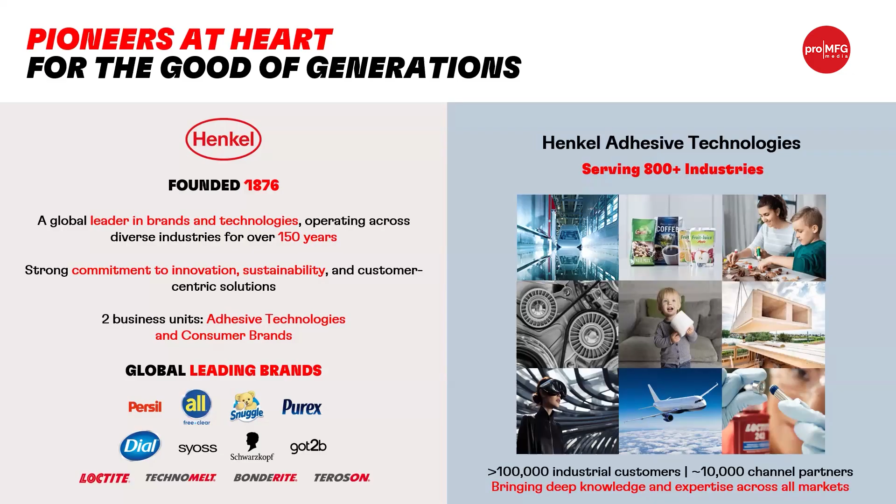Welcome you all to this masterclass on solutions for asset integrity across ports, jetties, and the tanks zone. I will start by briefly introducing Henkel and sharing what we offer. Henkel is a global organization with its headquarter in Germany. Henkel operates into two categories: adhesive solutions and consumer brands. With a long legacy of 150 plus years, Henkel brings sustainability and reliability to its customers with an innovative approach across its brands, be it in industry as well as the consumer market.

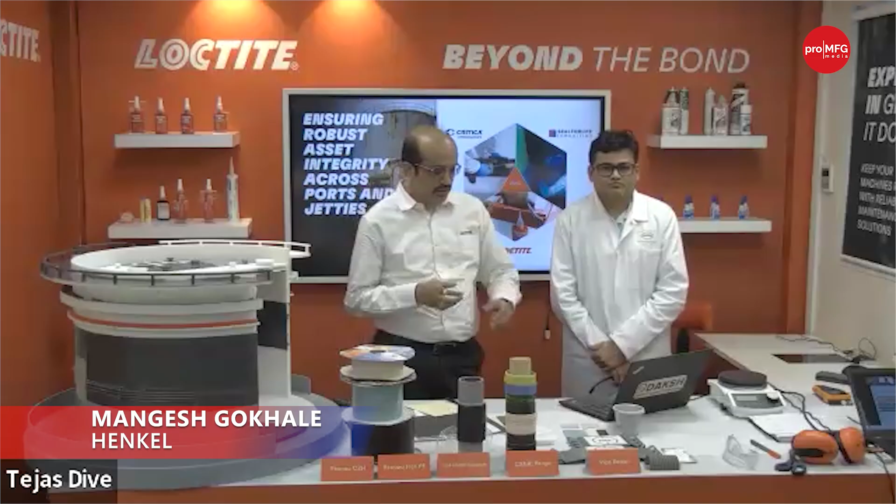Within the consumer industrial market, we have many brands and segments to deal with. Today we'll be focusing mainly on solutions for maintenance, repair, and overall asset integrity. What we represent here today is a combination of three brands: Critica Infrastructure, Seal for Life, and Loctite, which help maintain assets to prevent them from being affected by aging effects and ensure they perform to their desired outcome. We have a comprehensive portfolio of solutions.

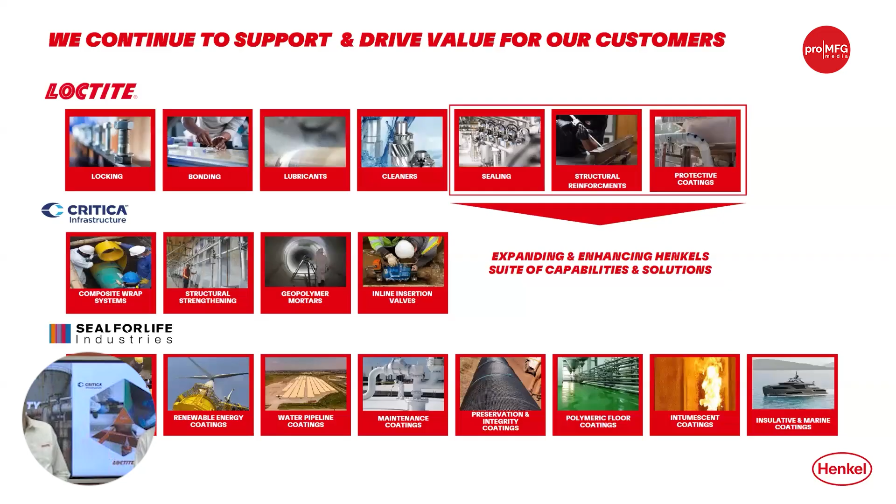Recently, Henkel has acquired Seal for Life and Critica Infrastructure. So what we can offer is an unmatched portfolio that deals right from upstream, downstream, and midstream solutions across the industry for corrosion protection, wear prevention, civil applications, composite repairs, and reinforcement. Within various industry segments, Henkel has brands in various solutions in Loctite, Critica Infrastructure, as well as Seal for Life, and we cater to multiple industries, multiple segments, to ensure assets perform to their maximum capacity.

So why this topic today? We wanted to showcase the solutions we can offer to aging infrastructure. India has a widespread coastline which has jetties, ports, and a tank network, and because tank storage capacity is growing, it is also aging each passing day. So we wanted to showcase our solutions through this webinar, this session. We encourage you to make it as interactive as possible, and we welcome all your questions and queries. Also we have a feedback form at the end, so we request you to fill that form and help us engage further.

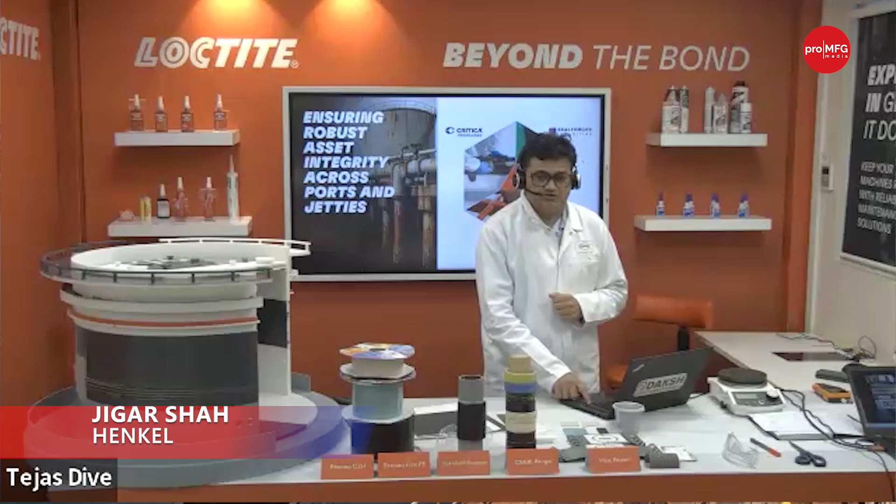So we can have our first poll here before we go to Jigar. Let me quickly go to the next chapter of the webinar. We'll reshare the slide, it's not moving. So now we are going to talk more about the right side.

So how the corrosion protection solution, composite repair, and thermal insulation coating really help increase the life of the asset, altogether ports and jetties. So we'll see the corrosion protection part first.

Corrosion is creating a big economical impact on India's GDP. Reports and studies say that corrosion costs around 3 to 5% of the GDP annually in India. That's a big number, and how we can protect the assets for the longer run and make it durable, that is a challenge.

When it comes to carbon steel, considering the big coastal line of India, we see a big corrosion rate, around 0.1 mm to 1 mm per year. That's a big corrosion rate for carbon steel, and no doubt there are many corrosion protection solutions available in the market to stop the corrosion.

However, considering the various effects, there are different phenomena, let us say the presence of chloride salts onto the surface, onto the atmosphere, and the high humidity nearby the coastal line.

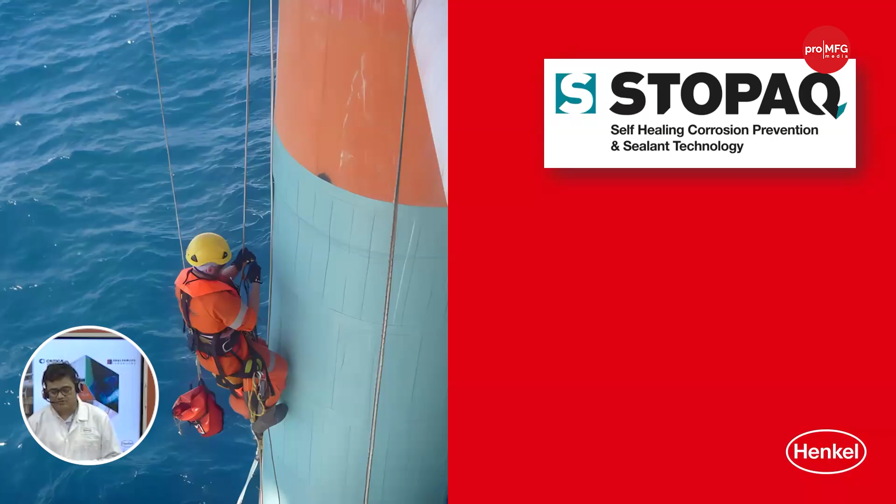Now, when it comes to the solution part, we are going to talk about Stopaq here. We call it Stopaq, and this is a kind of elastic solution that helps provide permanent or long-term corrosion protection with a self-healing kind of solution.

What are the properties of this Stopaq? When it comes to the property, basically this Stopaq altogether is a polyisobutene based coating technology. What exactly it does is create an impervious layer. So whether water, oxygen, or MIC is there, it will not penetrate the PIB, and it creates a barrier effect continuously to stop the corrosion. So this is how the PIB based Stopaq really works here.

Another important parameter is the bonding, the adhesion onto the surface, onto the unprepared or low prepared surface. The minimum requirement of the Stopaq is surface preparation ST2. That is the minimum requirement.

Here what we do is run a demonstration, and I'm having a panel. You can see the rusted panel, so this is the rusted panel that I'm carrying.

What we do is use a kind of ST2 surface preparation here. Let me use the wire brush and also the emery paper. The idea is the minimum surface preparation requirement for the Stopaq. If we consider other corrosion protection solutions, the liquid ones, the ideal condition is blast cleaning, whether it's SA2.5 or SA3. But with Stopaq, we can go ahead with minimum surface preparation.

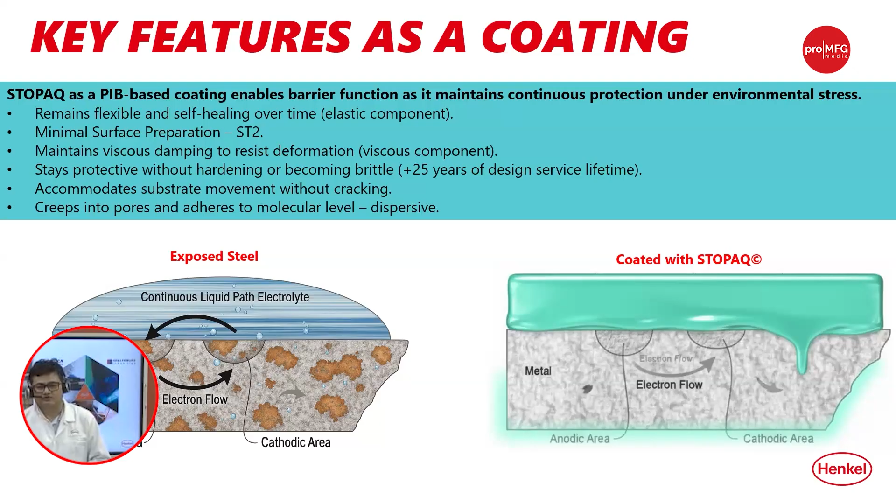Coming to the full value chain of this Stopaq, apart from providing long-term or permanent corrosion protection, safety is a big right in industry. Here you can see the Stopaq is non-dangerous good, non-toxic, easy to handle, easy to transport, and also being non-crystalline, or non-cross-linking amorphous, fully amorphous material, it can provide longer shelf life as well.

Coming to the pre-preparation part, before applying to any asset, let's say the pipeline or tanks, the minimum requirement is ST2 with solvent cleaning and removing loose rust and dust. Then, as mentioned, it is substrate agnostic, meaning it can apply on dry surfaces as well as wet surfaces, condensing lines, so there is much versatility with the application when we talk about the Stopaq. When it comes to the installation part, there is always a challenge when we talk about liquid coatings during installation.

So we need many tools and tackles required, whether it's for a blasting machine, air compressor, and whatnot. But to apply the Stopaq, we just need minimum tools - let's say a scissor or cutter, one or two different tools that we need, and then it's very easy to wrap it.

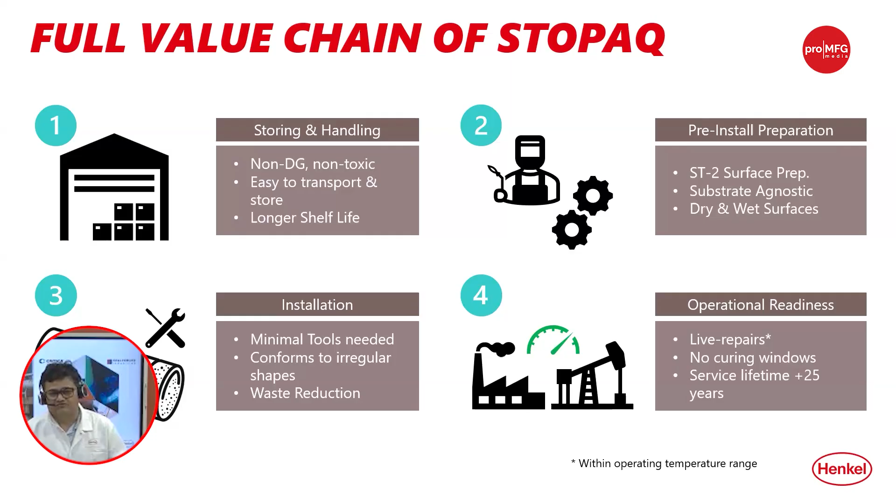Now going forward, we can see how this Stopaq can be applied on the splash zone area. So we'll run a small video on the splash zone.

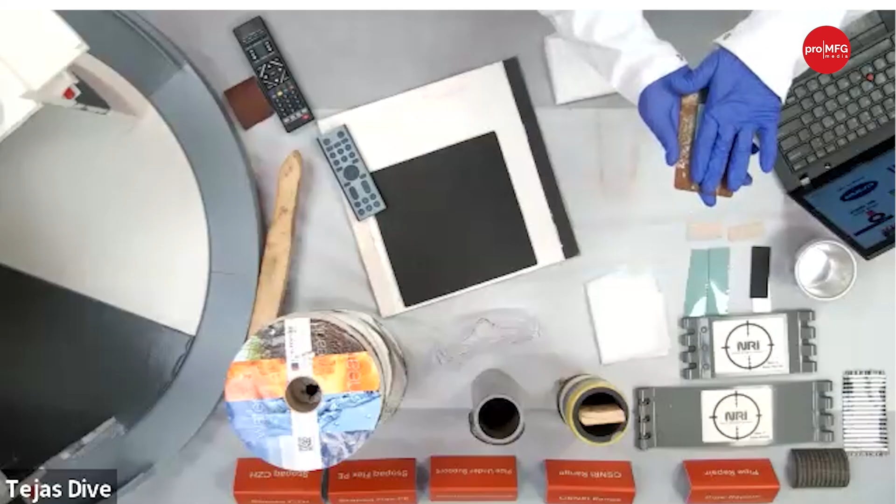As you can see, to apply this Stopaq we do not need blast cleaning. Now what we do is run the demonstration on a rusted surface. So we applied this particular Stopaq on the rusted surface, and now we see the adhesive works - I'm now just going to pull it, and you can see the adhesive part as well.

Okay, so lots of force that I need to apply to remove the top part, and you can really see it's very, very difficult to remove Stopaq after bonding onto the rusted surface, almost covering more than 95% of the area of the surface. This is how Stopaq will remain there and provide continuous long-term corrosion protection.

You can see there are different asset owners in India that have used this particular Stopaq application - that is Indian Oil, Reliance, Adani, and many other Indian customers.

Now coming to the composite system - composite repairs can provide a proven, reliable, and safe solution to repair and strengthen damaged pipelines, tanks, and different equipment without any replacement. All the composite pipe systems we provide are based on high strength fiber reinforcement along with an engineering polymer matrix embedded together to create a composite wrap that can not only provide corrosion protection but also sustain pressure and provide chemical compatibility.

So non-metallic pipe repairs - that is what we normally recommend to our customers because there are multiple benefits provided with the non-metallic option. Since it is not a metallic pipe, it cannot corrode.

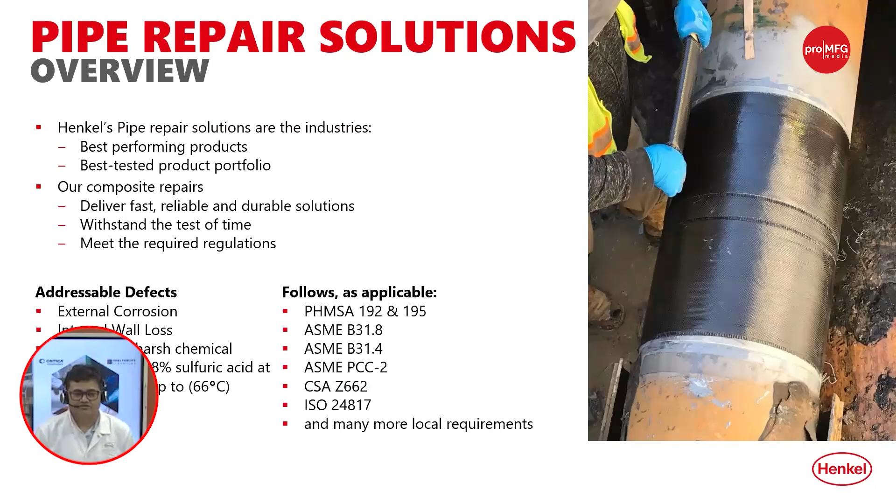Let's say the wall loss or thickness loss, or pinhole or cracks, or exposure to very high chemical areas. These are all challenges that we can target or solve with the composite pipe repair system.

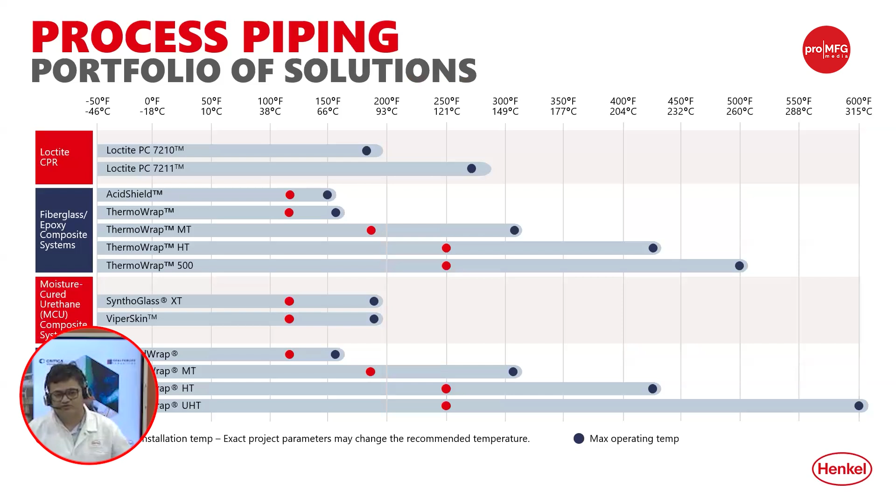Coming to the different portfolio available with Henkel. Considering the CSNRI, we now have a bigger portfolio on composite pipe repair. With Loctite composite pipe repair, we can address and repair and strengthen the pipeline and tanks up to 130 degrees centigrade with various chemical exposure.

With epoxy composite solution system fiberglass, let's say the AcidShield that is developed for acid environments or acid pipelines or acid tanks, to strengthen them. Moisture cure urethane is basically designed considering condensing pipelines or underwater pipelines or piles. To strengthen that, we can also apply the moisture cure polyurethane.

And there is another system we call the Diamond Wrap, which is again based on epoxy and carbon system, where this can work up to 315 degrees centigrade. So a big portfolio to cater to different applications and challenges to increase the life of the asset.

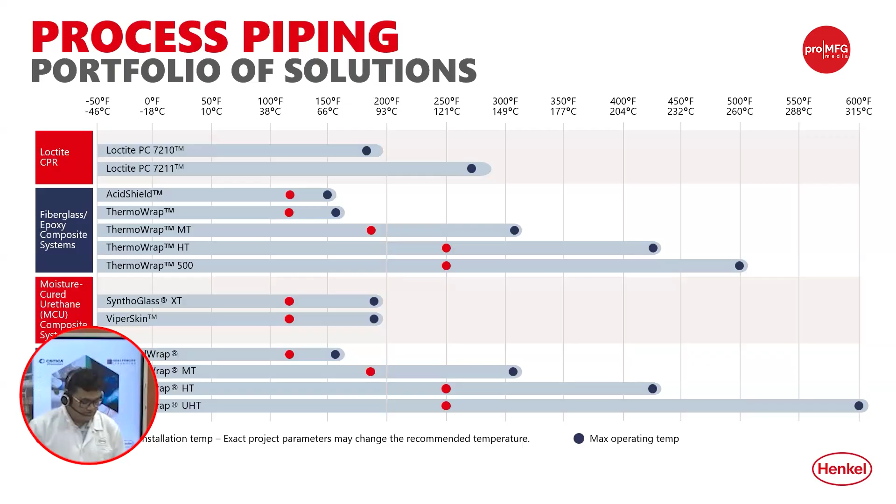On the fiber side, normally we are working with carbon fiber, glass fiber, mix of carbon glass, and also basalt fiber. In terms of the engineering polymer matrix that is embedded to the fibers, that is mainly epoxy and polyurethane. So these are the overall systems or solutions we are providing to increase the life of the asset.

Now, quickly, we are having another solution we call composite clamp. So here you can see it on my hand. This is helpful if there is an online leakage from water or hydrocarbons up to 17 bar. We can use the composite clamp, available from 2 inch, 3 inch, 4 inch, 6 inch, and 8 inch sizes, and that can work very fast.

And the benefit is, on this composite clamp, we can also wrap the composite repair system as well to make it permanent. So this is how we can provide the solution.

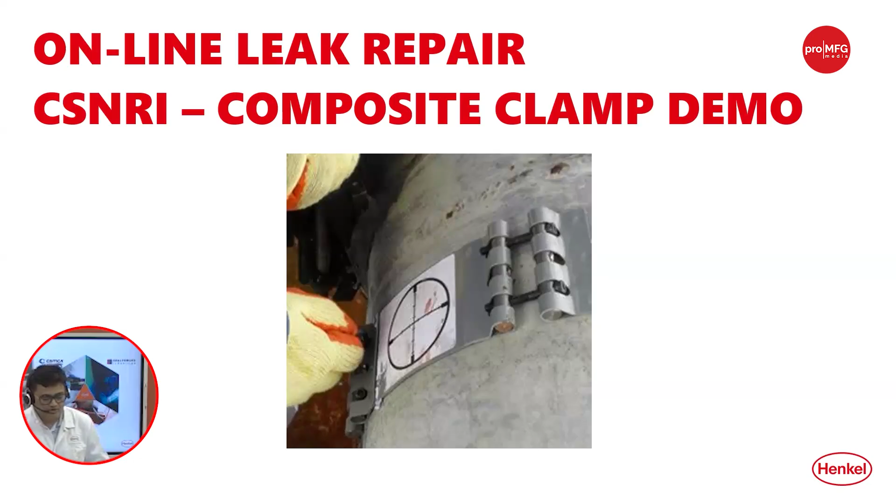Now, I would request Tejas to perform the composite clamp demo that is live online.

Thanks, Jigar. Before moving ahead, can you just please confirm if I'm clearly audible? Yeah, okay, so I hope now you all can see me.

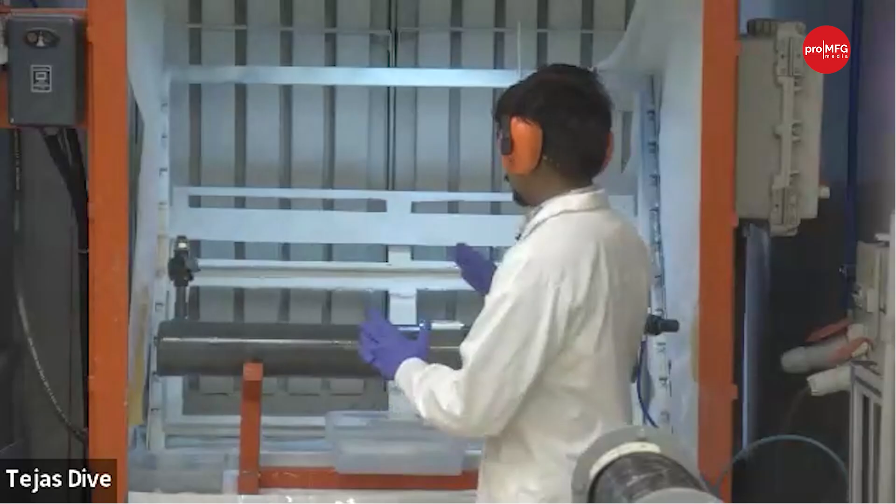So this is our demonstration setup where we have a 4-inch pipe with a composite clamp for the 4-inch pipe. What we will do is pressurize the system. As soon as we pressurize the system, there is a leakage in the pipe. See the water coming out of the pipe, and we will arrest the same with the help of the CSNRI clamp.

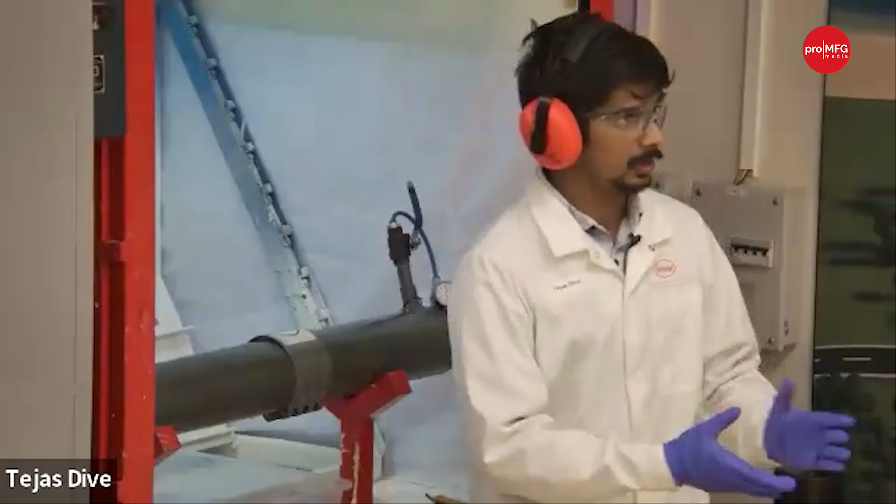So for a better look, we will just quickly shift the camera angle. I just request the same to Jigar, and Jigar, please confirm once the camera angle is changed. Yes, yeah, thank you.

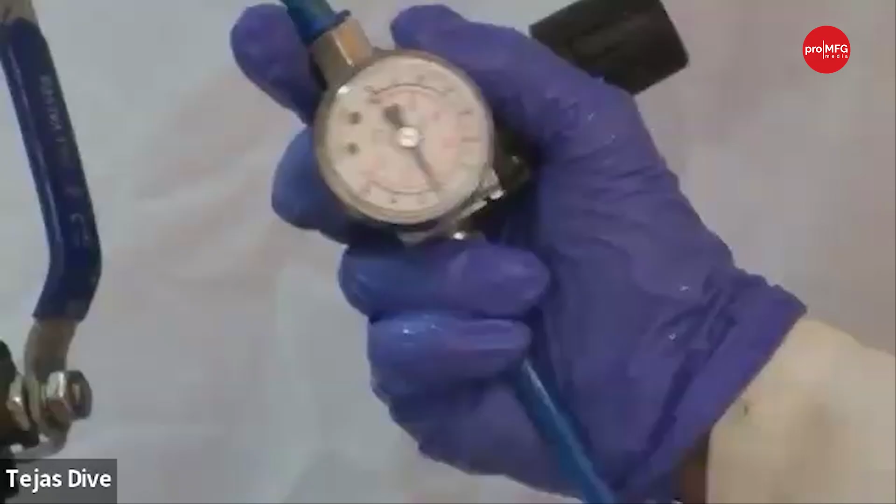Okay, so now this is about composite clamp. Now we will just have a quick look at the pipe repair and strengthening solutions in the CSNRI portfolio.

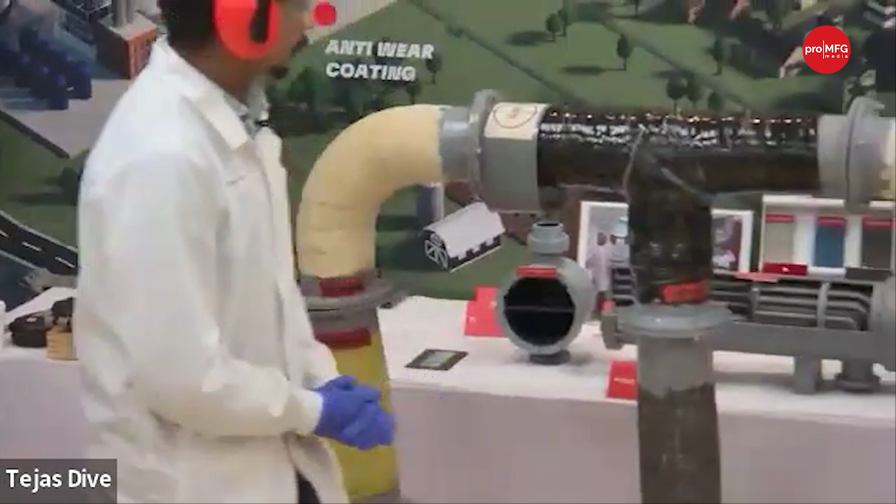Okay, so this is how the solutions will look. We have different solutions for different applications, as an example higher temperature, depending on the requirement. So what you can see here is Loctite 5085 with 7210, then again thermo wrap, diamond wrap, which will vary as per the requirement. And yes, we can not only apply on the straight pipe, but to elbows and also the T-joints.

Yes, with this is about composite clamp and the strengthening and repair solutions with CSNRI. And with this, back to you, Jig.

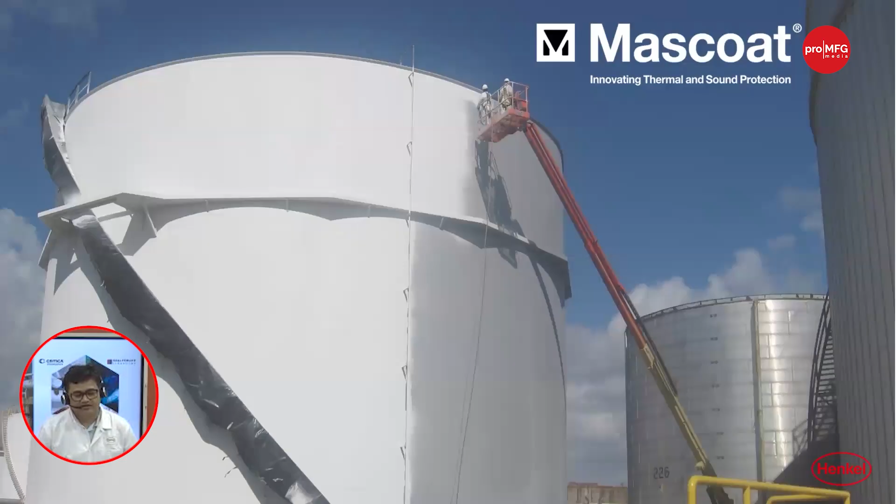The next part of it is thermal insulation coating, and that thermal insulation coating provides benefits like energy retention, personnel protection, radiant heat reduction, and also managing the insulation as well. Mascoat is very much prominent, and Mascoat has been providing this solution for more than 35 years in the industry to support the customers.

So you can see that in industry, if you go and visit any plant or process industry where insulation is being used, we can definitely find similar kind of challenges to what you are seeing currently. As per studies and references, there are 10 to 30% of the area in the industry where we can find that insulation is either damaged or not available. These are big challenges, because if the insulation is damaged, it can create a kind of challenge to the customer. And if insulation is not there, it is consuming more energy to maintain the temperature. So it's a big challenge to the industry now.

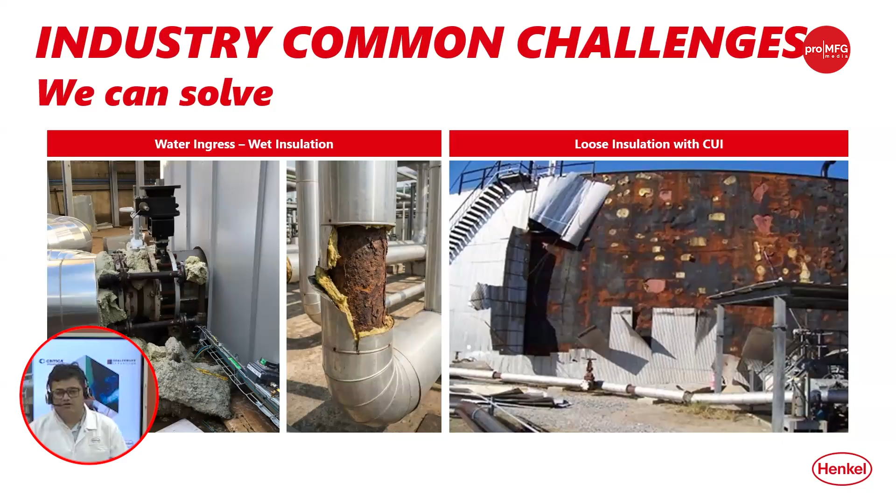How can Mascoat provide the solution related to personnel protection? Let's say the temperature of the surface is exposed to 120 or 130 degrees centigrade. If we apply a 1mm coat of the Mascoat, it can reduce to a safe-to-touch temperature. As per standard 1057, that temperature is 58.3 degrees centigrade. Beyond that temperature, it is not safe to touch, and below that is safe to touch. So after application of only 1mm coating, we can really see that it is safe to touch.

So apart from personnel protection, we can see energy retention and CUI. CUI is a big challenge currently in the industry, because the current insulation being used, we can say it is mineral wool or glass wool, can provide very good insulation, but at the same time, if moisture or water penetrates inside, it will drastically reduce the thermal insulation property, and also start the CUI at that point.

So once the CUI is happening underneath the jacketing or cladding, it is not visible. That is again a challenge. So visibility is a big challenge if moisture penetration or water penetration is there, where Mascoat can really support.

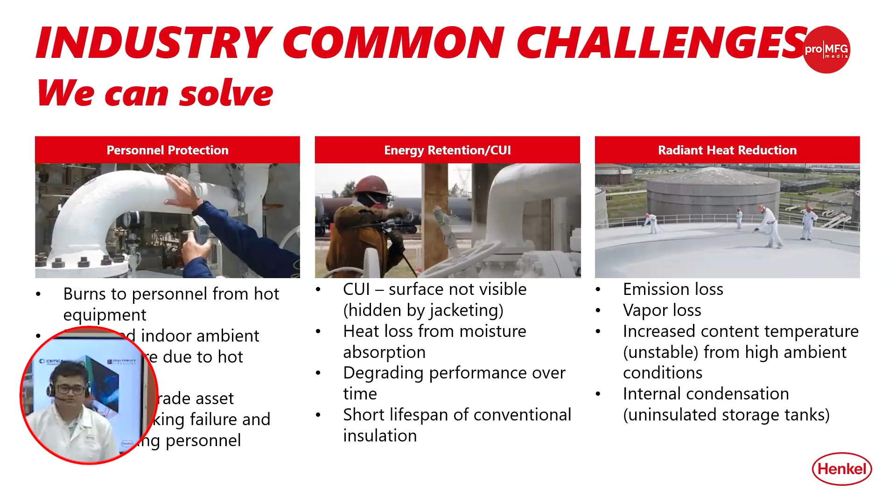And the third application we call radiant heat reduction, where if there is a loss, let's say a solvent tank or naphtha tank, with vapor loss inside the tank because of high solar loading from outside, we can use the coating to maintain the temperature inside and reduce the losses. So this is how Mascoat can support here.

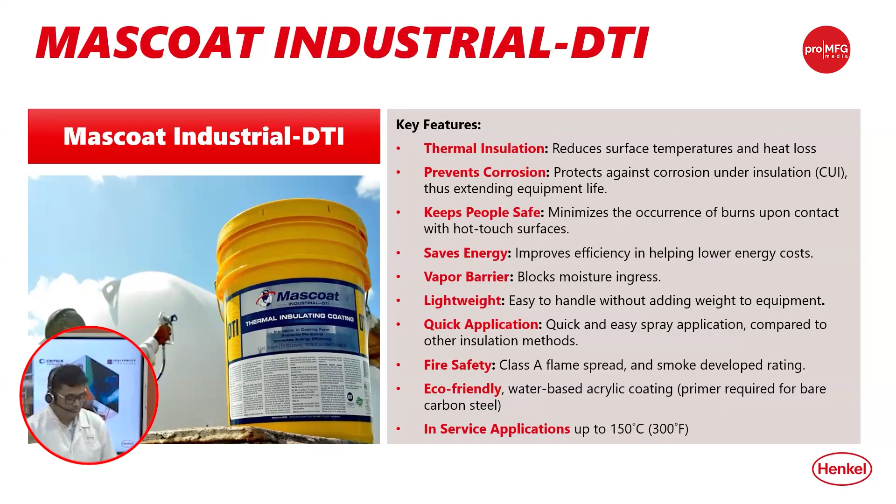And the important part is, if the surface temperature, let's say of the pipeline or tank, the process temperature is around 100, 120 or 150, we do not need to take a shutdown. We can directly apply Mascoat at that high temperature. So we'll see a small video of how we can apply the Mascoat DTI.

So we have just started now talking about the Mascoat in India, and you can see there are satisfied asset owners globally that we are now supporting our customer in terms of the thermal insulation coating. Here I request to raise a poll inviting more on the solution for the storage tanks, pipelines, and concrete repair.

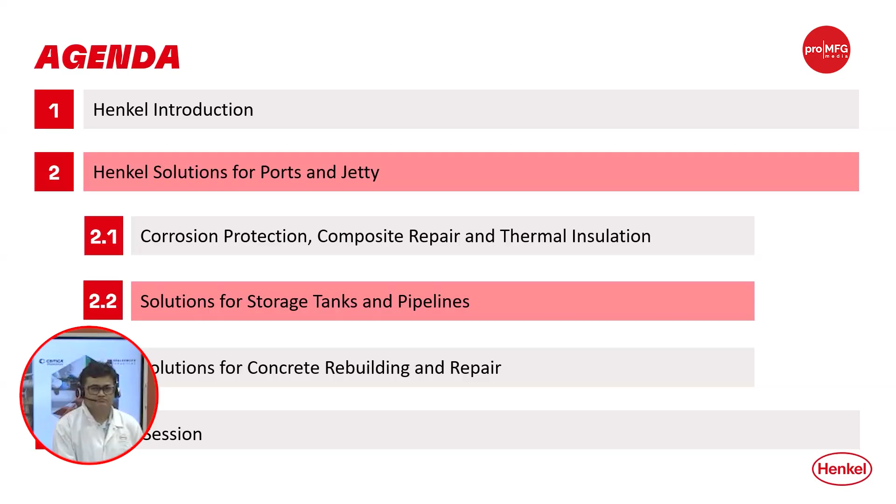What do you want to? Thank you, Yigar, appreciate it. I hope everybody is, for what I can see on the chat box and the Q&A, I can see a lot of questions are coming.

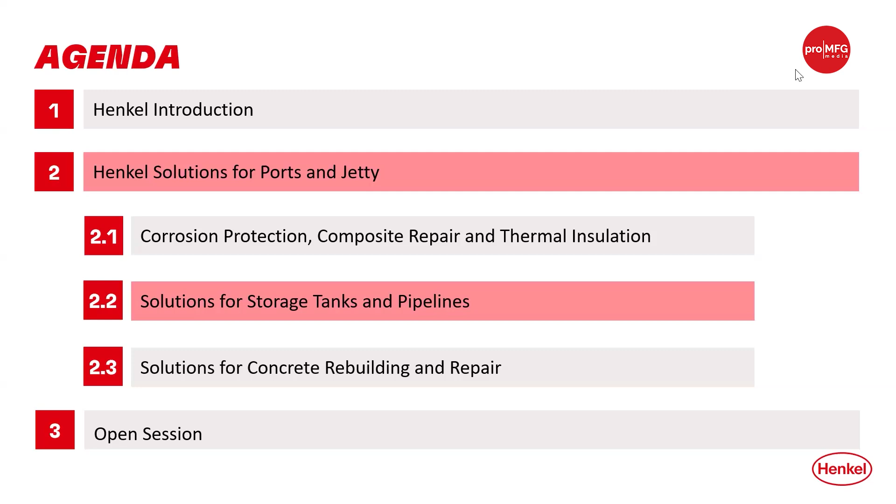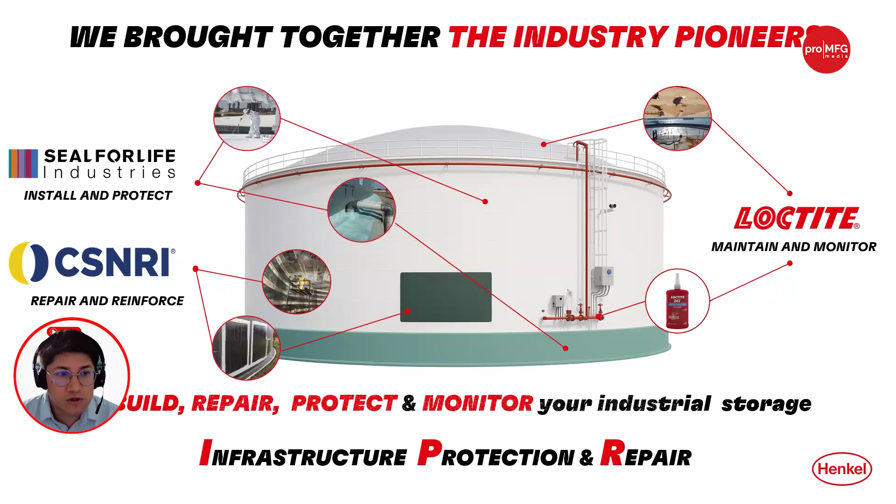As we already mentioned in the introduction, we brought a whole portfolio of solutions together to make sure that we are ready to help you build, repair, protect, and monitor all your industrial assets. Specifically here, we can see that all of our portfolio of brands have solutions for tanks, especially because a tank is one of the key assets we see across all the industries that face different environments.

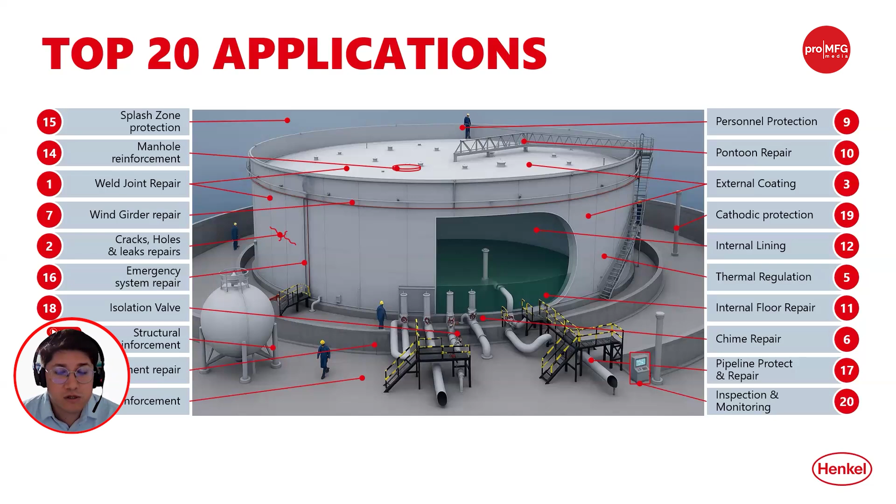If we can go to the next slide, please - here are only the top 20 applications that we can do in tanks with our different solutions, and it goes all the way from weld joint repair to cracks, holes, and leaks in different parts of the tank roof and shell, to the tank chimes or the tank base sealing, naturally the cathodic protection, external and internal coatings, and if the tanks are also in the coastal area, we'll give them additional protection to chloride environments and splash zones. So let's get a bit more into details with some of our case studies, starting with the first one.

As you can see here in the storage tank, we come in and understand the asset and the challenge. In this case, we needed to do a shell repair and re-strengthening. The challenge initially was that water ponding areas of the tank were accelerating pitting and corrosion, leading to pinholes. The tank was exposed to atmospheric corrosion, and due to the leaking, it accelerated internal corrosion into the shell. So what we did was use our Loctite and CSNRI composite repair systems that the team has just explained.

We came in, re-strengthened, and patched up the tank to extend the service life without needing to do hot repair. All of our solutions, as we already mentioned, meet the ISO and ASME standards for designing that, and the applications are easy and simple to apply.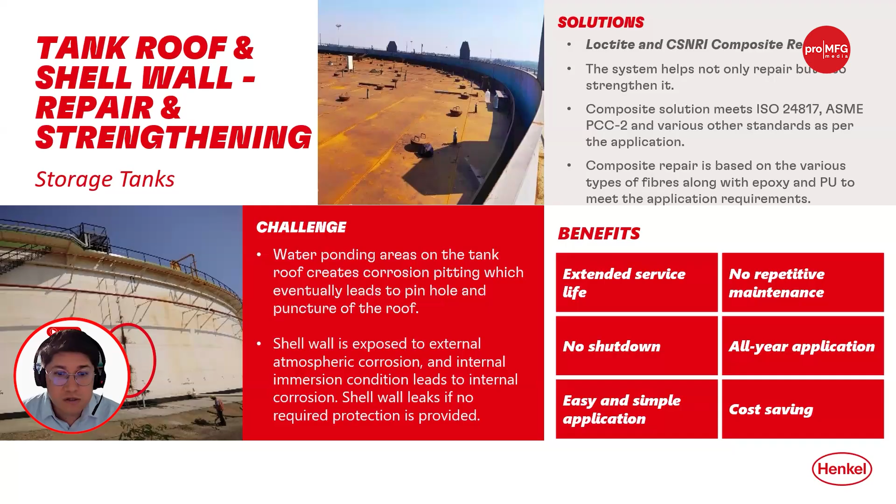Can you go next? Then that was on structural reinforcement, but also before structural reinforcement, if we want to ensure that we are protecting, we also have our whole set of solutions for coatings.

In this case, we can see that we had some water cooling tower raiser pipelines that had heavy corrosion. We cannot stop or plan a shutdown to do a pipeline replacement, because it's not only costly and inefficient, but also the lead times to get these pipes are not fast. Same with storage tanks, they suffer from heavy corrosion because of the environment, coastal areas, or even chemical fumes surrounding them.

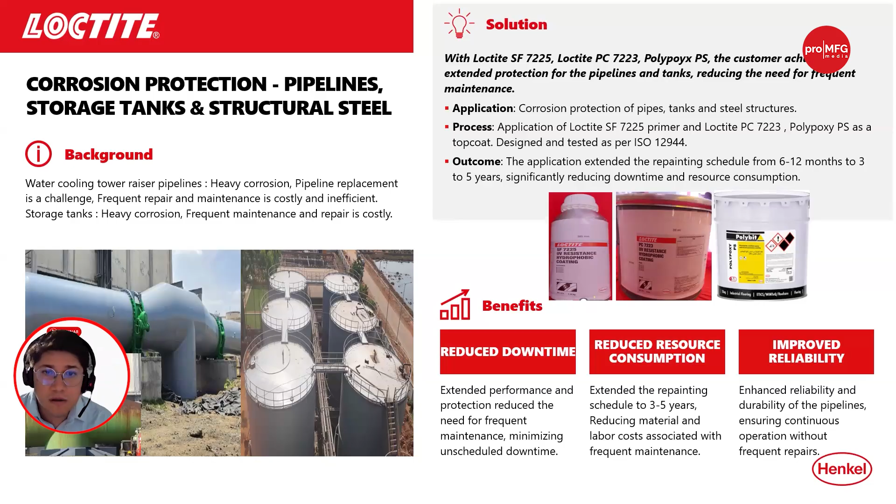In this case specifically, we have used different types of solutions. We have different products like the SF7225, which is a primer that can go into different types of surfaces and different types of surface preparation, and we can go into details in a minute. Then we have an intermediate coating and multiple different top coats that can be applied on this.

What you can see here as well, we came in the area that needed more specific focus. We repatched, we recoated, and extended the whole lifetime of the tank in this application, doing the same with the pictures before of the pipeline. So it doesn't mean that you need to cut and replace. We can come in, assess the damage or the challenge that your specific asset has, and then determine what is the best product in our portfolio to fit.

This is a great example also about our thermal insulation coatings. In this case, in Latin America, we have a naphtha storage tank that was suffering from evaporative losses. This was caused because the atmospheric temperature caused the tanks to raise the internal temperature, producing more vapors and more material loss. Also in the next phases of the process there were issues because of changes in viscosity. So we came in and did the thermal analysis.

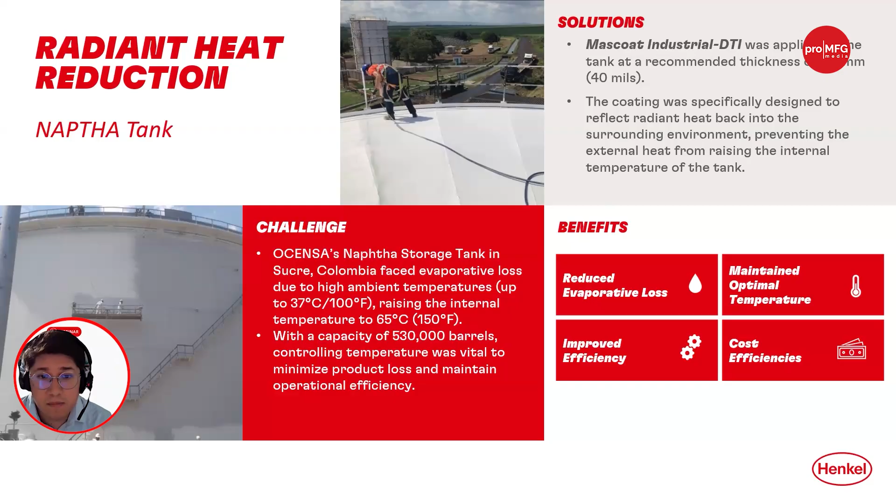We determined that with our Mascoat Industrial-DTI solution, applying 1 millimeter thickness on the tank, we were going to be able to reduce the radiant heat, control the external temperature affecting the internal temperature of the tank, and reduce the vapor losses. This is very important, not only because of the process and operation itself, but also because of the emissions it causes. So it has an impact on cost, efficiency, and sustainability.

Then a very common issue, traveling across the regions, we see this more and more often: the base tank where you have the concrete base and the metal shell of the tank. Due to the difference in thermal expansion of the materials, we typically see this creates gaps in between. These gaps then create spaces for moisture and water to ingress, causing a lot of damage to the bottom plates over time. This is extremely complex.

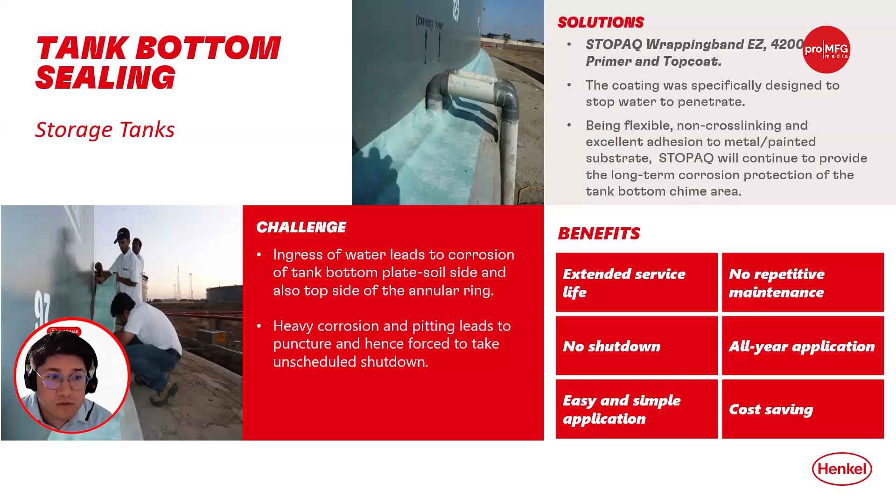So what we come in and do with our STOPAQ solution, we seal both the base and the gap that is created between the tank and the concrete, to avoid future ingress of moisture and water. This becomes a barrier protection, as Jigar mentioned, for oxygen and moisture, and this allows us to extend the service lifetime, reduce risks of the bottom plate and annular ring being damaged due to external corrosion, and simplify the solution, because the surface preparation is quite straightforward for this solution as well. So you see some pictures here of the end product.

Now we go to the solutions for pipelines and piles. This is a pretty common challenge. Most of you, and I've already seen some questions in the chat regarding this. Some of the piles that we see, in this case in Italy, we've seen deterioration of the piles over time and on the existing or starting coating that they suffered.

So we came in with our STOPAQ Wrappingband solution, which can be applied in moisture and underwater conditions, allowing us to be very flexible in terms of application. We did 450 piles since 2012, and we are still doing it year to year. So what we are doing is not only extending the service lifetime, but also minimizing impact on the environment, because we don't need to do surface blasting - we do jet water blasting, and it allows us to do it live. No shutdown is needed, and we can adapt quite drastically with divers, with boats, and different flexible application methods.

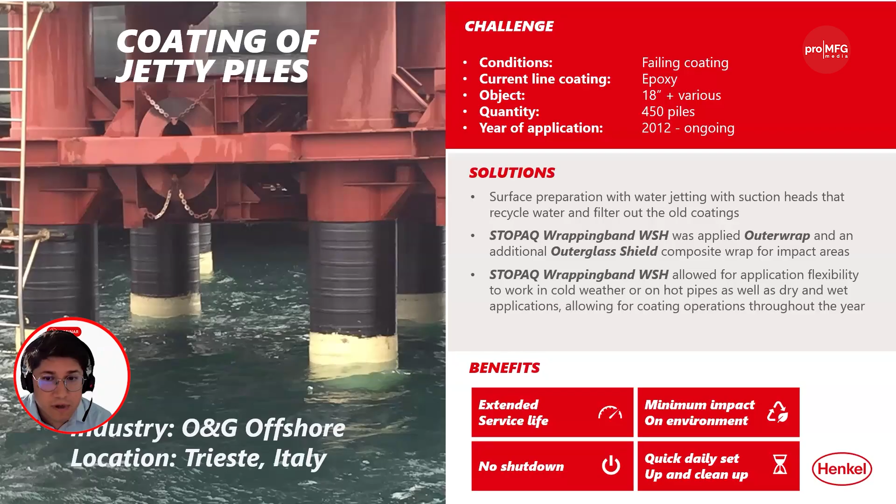This is another great example of the flexibility of STOPAQ and its impact besides corrosion protection.

In this case, we had a coastal area in Scotland, in the UK, right in front of the sea, where we needed to rehabilitate the whole pipes. You can see it in the left picture, even on the back of the already coated lines, there are some lines with corrosion. In this space, given it's a refinery, we were not able to do sandblasting unless we fully encapsulated the whole environment due to the delicate equipment surrounding it.

They traditionally use a 3-layer system that needed to be recoated every 5 to 10 years, and that created a repetitive cost and time consuming process because of the full encapsulation, habitats, and everything that needed to be created. So to fight that, we came in with our STOPAQ Wrappingband, which has a very robust resistance regarding surface preparation and the substrate material. We came in without doing any habitats, applied the products without damaging or sandblasting any of the other equipment, did a full coat of the system and protected it over. It's been over 10 years now of this application, and they are still going. No need to rehabilitate the coating so far.

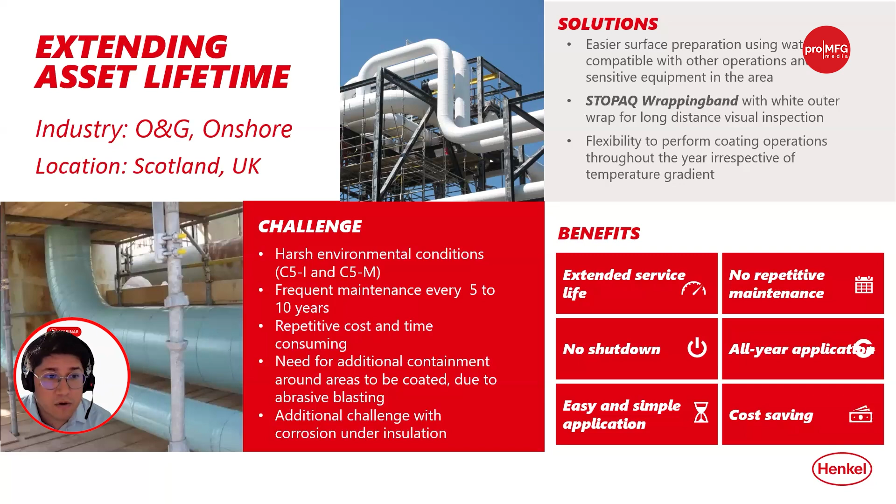Another very common challenge with pipes is the CUPS, the corrosion under pipe support. What we tend to see is a lot of crevice corrosion in these areas because of the vibrations, the friction caused with the pipe support, but also the general atmospheric conditions that impact the pipe after the coating is damaged. So what we have here is a combination of our composite repair system. We create a patch, and this has been widely used in India for some years. It's very straightforward. We create a patch and we can come in and re-strengthen the pipe bottom. It's applied in situ, online, and it's a cold application.

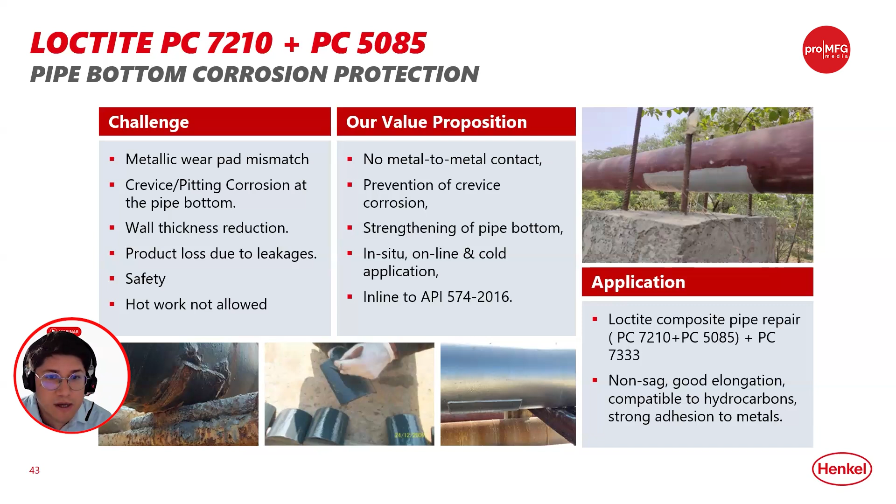And it brings back to life the pipe supports and the pipes in this specific segment. So very, very strong application that was born in India. I just want to highlight as well, as you guys have seen in the live demo that just helped us, we have a combination of not only the composite repair solutions, but also the live leak sealing solution that we require to then apply the composite repairs.

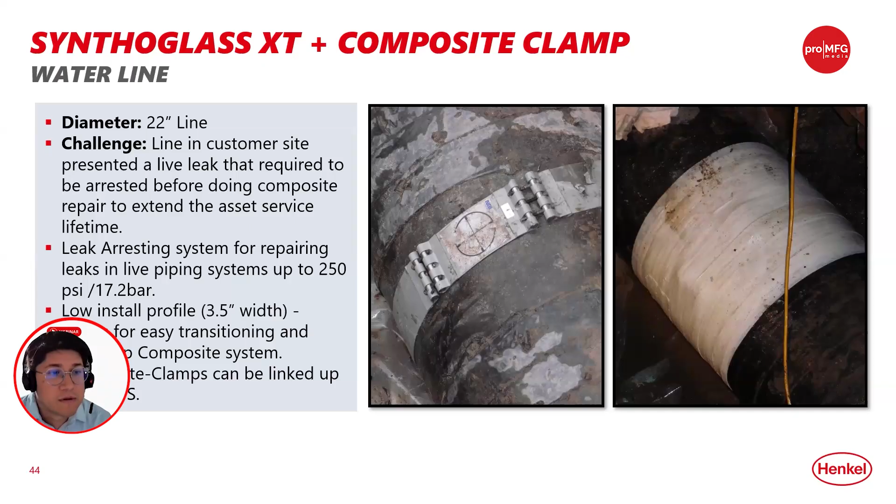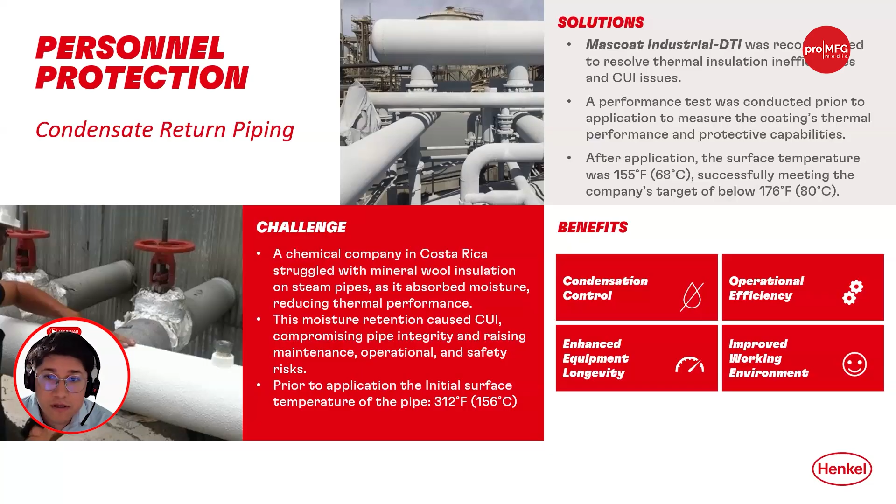Personnel protection, as Jigar mentioned before, whenever there's pipes, we typically use traditional insulation for hot surfaces. What we saw with this customer was that their complex geometry and the tight spaces in between the pipes created a rough situation for installing insulation, but also once the insulation was installed, they suffered a lot of corrosion under insulation, CUI, because of the integrity of the system. So we proposed our Mascoat Industrial-DTI system that was sprayed and applied across the different pipes, and not only pipes but also heat exchangers and different types of equipment in this section. We were able to reduce the temperature successfully from 156 degrees Celsius to 68 degrees, which was below the target of 80 that the customer originally had.

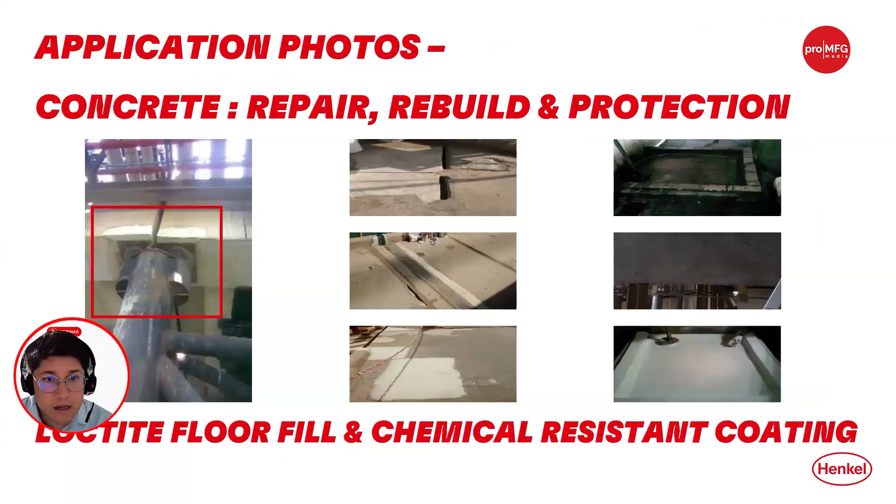Last but not least, we also want to highlight the concrete rebuilding and repair solutions we have. As you can see in the next pictures, I'll go very fast on this, but we have different types of solutions, not only for metal substrates. In this case, you can see some pictures of our concrete repair solutions from coastal area repair, as you can see on the left. You can also see flooring and floor fill chemical resistant coatings for containment areas on the right.

So just to close out from my side, I just want to highlight that as we try to be very fast in this conversation, what we want you to take away is that we have a broad portfolio of solutions that we are always willing to discuss. So if you have any challenges similar to what you have seen, or even different to the ones you have seen today, we will always be happy to have a conversation and try to get the best solution.